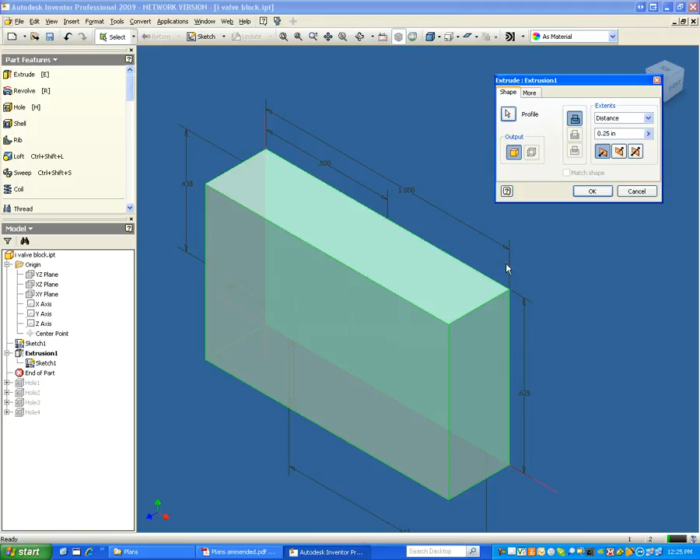Now, one thing that I want to show you about this, if I edit the feature, is that I make my material go away from the sketch, behind the sketch, so that I can see the sketch for later on. So if I bring this over here, you can see that this is the default. If I make it go behind the sketch, I can always see that sketch on top here for later holes.

The next thing I did was I made the first set of clearance holes. So if you look on the amended plans, you'll see that I'm making this part right here as my first part.

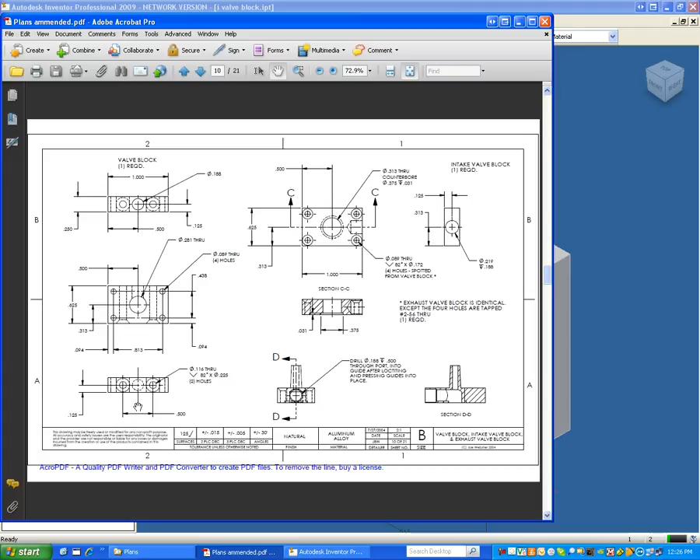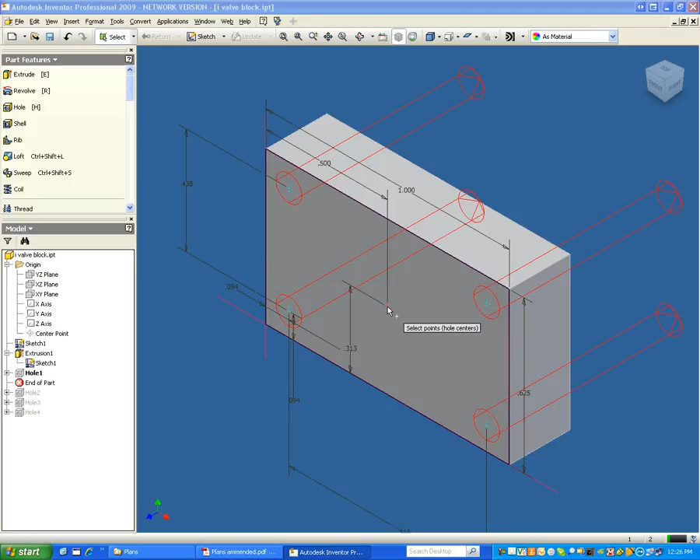So I made that first set of holes, and then the next thing I did was I made the next hole. The way that I separated those two was I right-clicked on this and said Share Sketch, and it allowed it to be its own entity up here. Then whenever I wanted to make this hole and I edited the feature, I can add or subtract holes by holding down Control and selecting another point in the same sketch.

Alright, so now we have, here's my menu. So I'm going to go ahead and say OK on that one. The next thing I did was I made that middle hole.

Now on this hole right here, you're going to make this size. If you edit the feature, you're going to see that the size of that was a clearance hole for a number 2 screw. So you have to go onto your chart and say number 2 clearance, recommended clearance hole diameter is 0.106. Don't use his recommended 089.

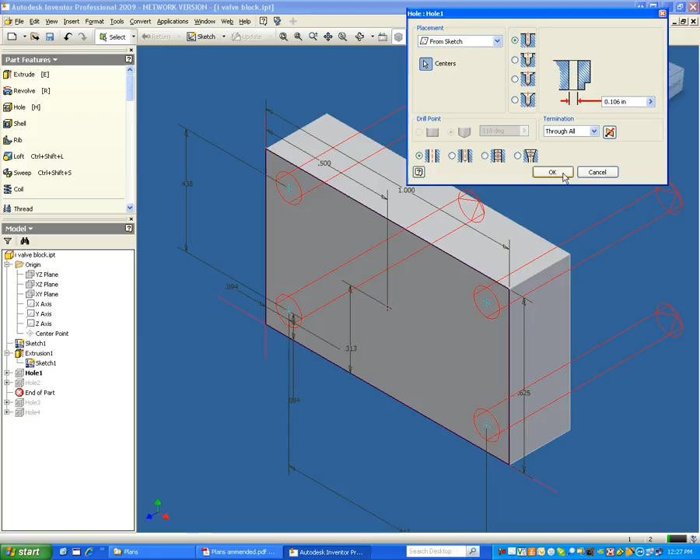Then I made this hole as per what he said for us to do on the drawing. If I right click and show dimensions, I can see that that's a diameter of 0.281.

If I resume the next feature, dragging the end of part down, you can see that I've created another sketch on this end down here, and if I make this visible, you can see that I have some differences in this. It didn't give me a dimension from the end, so what I did was...

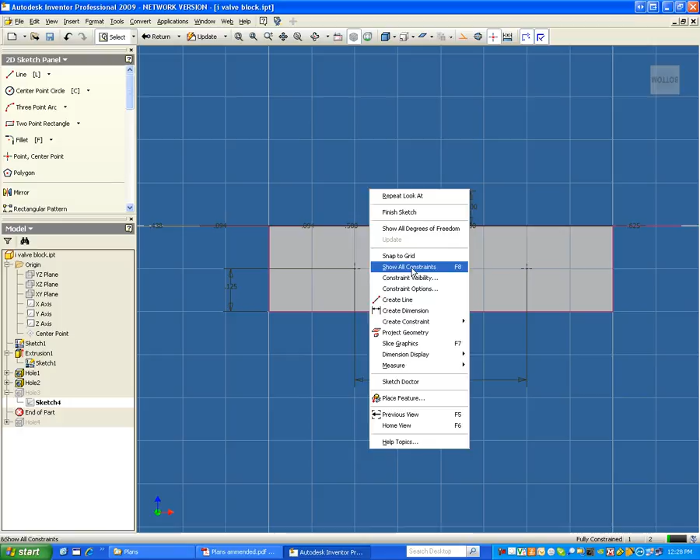I made a point at the midpoint of this entity, but I can make this line up horizontally. If I right click now and show all constraints, I make this line up. So I'm going to delete this one, and I'll show you how I do that. I made a center line style by clicking this icon, and I make a line.

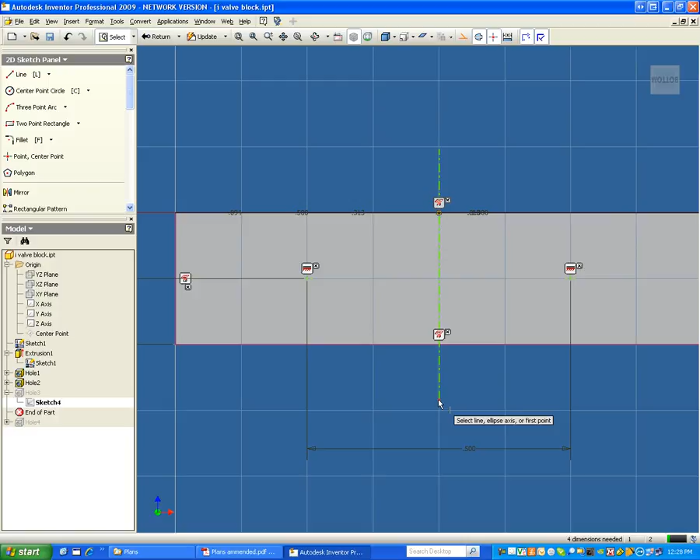Now it may be on the center mark, but it doesn't know where it is yet. So the way that I do that is I say I want these to be vertically lined up. I want this, let's say the end point of this, to be vertically lined up with the midpoint of that. Now it's totally dimensioned, except that it doesn't know how long it is or where it starts, where it finishes.

Okay, those are the 4 dimensions that I need. So what I did here was I made these 2 points, which aren't dimensioned yet, symmetric around that, so that no matter how big this part is, they're always in the center. From the center, they're always 0.5 apart. So I made these 2 symmetric around this center mark.

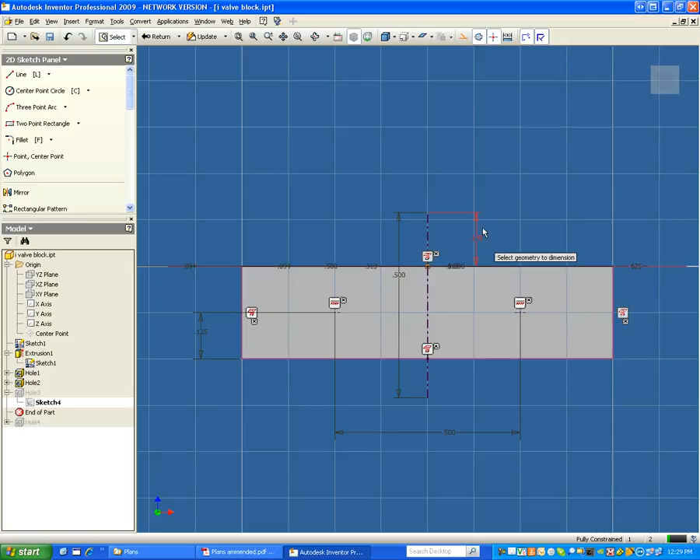Alright, now the only thing that's needed is a dimension for the length of this line and where it needs to start from either end, and give it some arbitrary numbers, but everything's fully constrained now. Anytime you put a construction line in there, you need a full constraint as well. Say done and finish the sketch. So now you can see that I don't need to locate these because they're symmetrical about this, and no matter where this is, it's always in the middle of the part.

Okay, now I'm going to pull down the end of the part to hole number 4, and hole number 4, if I go to its sketch, it's actually dimensioned from 2 sides, so you want to make sure you're dimensioning from the same sides of the part.

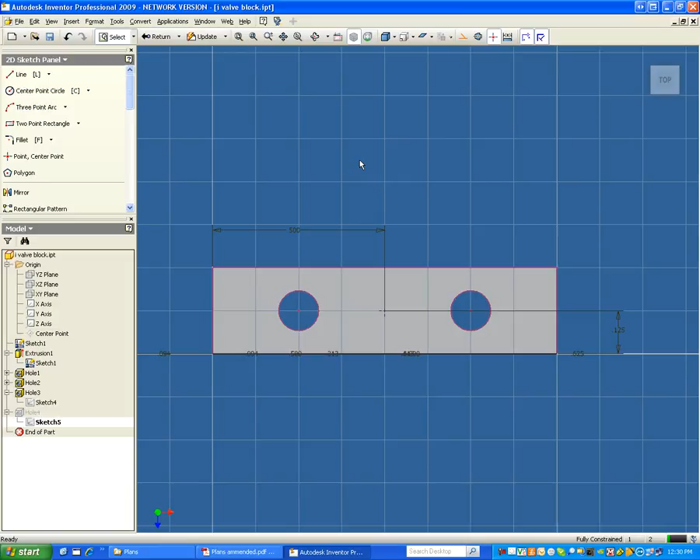And now we have our first part. I'm going to hide this first sketch. I shared the sketch because I used it between the holes and the protrusion. And I'm going to save the part as I valve block. Just save it.